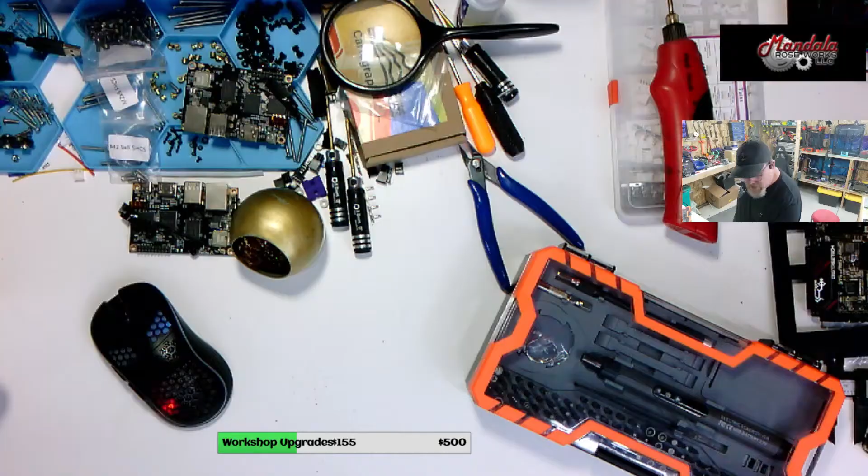Top-down camera. I picked this up off of the Amazons, my new little electric screwdriver kit. I paid 16 bucks for it. Comes with an electric screwdriver, it's got a bunch of torque settings, because arthritis sucks. It says off, so you got to turn it on. It still says off.

Turn on, man. There we are. Oh, yeah.

We got like 120 bits and all that crap, plus the charging cable and a bunch of spudgers and stuff in here. Nice little setup here.

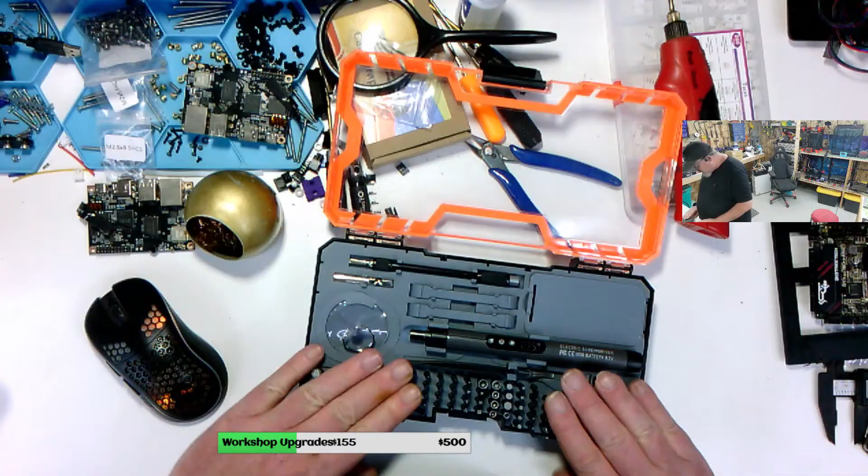My only complaint is there's no long bits. If anybody knows where to get the long bits for these things, please send me a DM.

Wifey's here. What's up? You're screwed now. I definitely am. It's fancy, it was $16.

I would really like to try Fanttik, but I can't afford that stuff. It's expensive, man. It's super expensive.

But arthritis just kicks my ass. I'm still trying to figure out what the hell this thing's for, it's a reverse of a Phillips. But yeah, we got all sorts of bits in here, and I'm looking forward to putting together a printer with it.

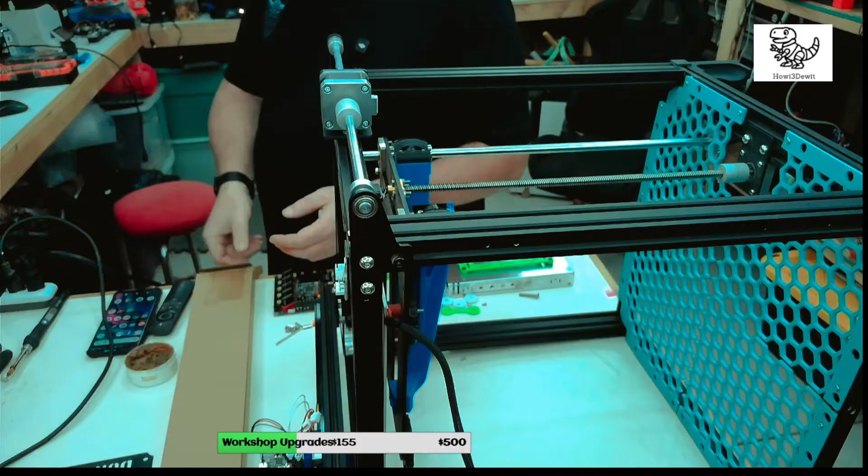And then let's go over here. You guys know we're building the Ender 6, right? So Amazon shipped this package right here in a 3.5-foot box, a huge ass box. And if you guys don't know, these are 2020 extrusions.

The whole purpose of this is to create the gantry for the Ender 6 Trident. Oh God, these are sweet, very nicely cut. European style, very thick. She thick, baby, she thick. Look at that, she thick.

And then we got ironic over here. Let's go back over to the main camera. So we got some 2209 steppers. I ordered a set of 3, right? Just 3. They sent me 6. I love Amazon screw-ups, so I have steppers for days.

And there's been a lot of, yeah, Amazon has standardized on fewer box types, which is dumb because it costs them money in shipping costs. So there's a lot of fun things going on here.

One of the things I want to do today is over here, camera. The one time I want you to follow me and you don't do it. Normal tracking. Come here, camera. Yeah, over here, buddy, the V0 right here.

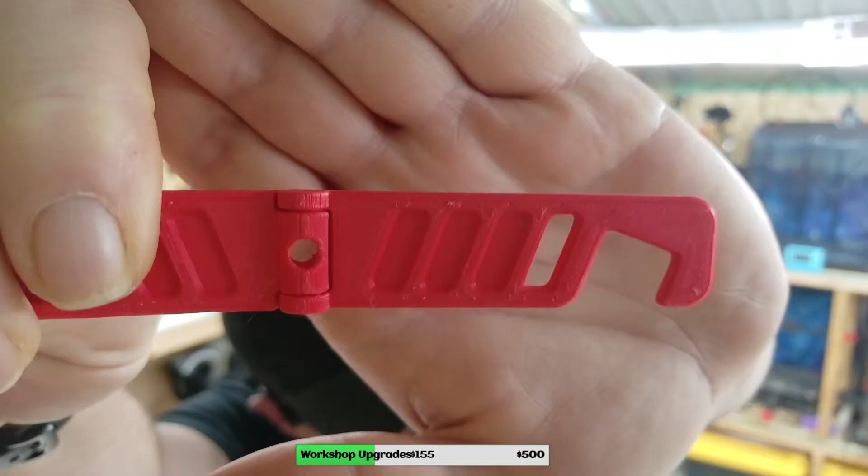And then we've got the DuEnder over here. We've got to do a little tuning on it. It's printing very nicely, but I got to show you guys this, there is an issue. If you guys look, this is a print off of the DuEnder. Now I'm not sure if the lighting is good enough for this, or if it will zoom properly. There we go, can you guys see in those slots there? It's a little ragged, and I just don't understand why. So we're going to tune it a little bit, reprint the same print, and see if we can't fix that up. And it's only ragged on one side, see here's the side that it's ragged on, and this is the side that was facing the bed. Can you guys see that? Yeah, there we go, that's a good shot of it right there.

4D chess, I don't know, 4D, 3D, I don't know. I'm a Trekkie, but I don't pay attention to the details like that.

Anyway, so we've got a lot of things we can talk about and do today. If you guys haven't heard, and I do need to actually update my Linktree profile with my GitHub, I've got the documents for the Ender 6 Trident up on my GitHub, and I'm contributing to that project daily. Nobody has that project documented anywhere. And the Ender 6 is literally the number 1 platform to make a Trident out of, because one, they're inexpensive, two, they're readily available, there are thousands of them out there on the marketplace.

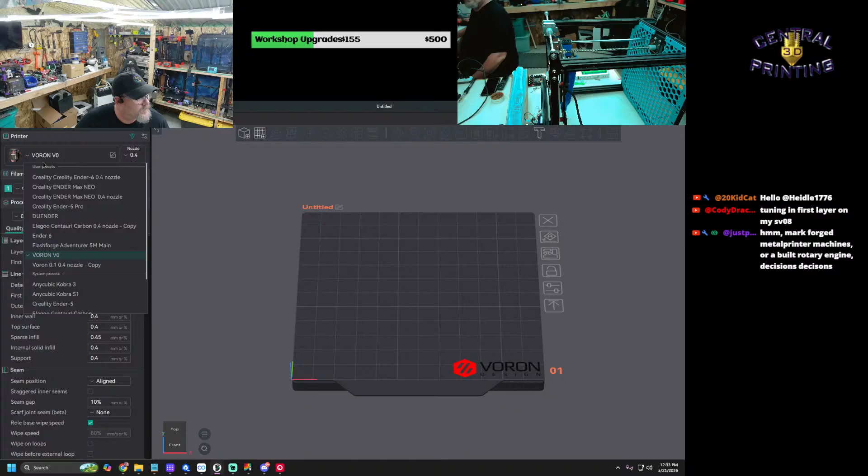So prepare, DuEnder. So we just got PLA in it right now. This is a basic profile that I've created. It was built off of, believe it or not, the Ender 5 profile.

Markforged metal machines, or a rotary engine? Decisions, yeah.

Similar to an Ender, it's a progress machine. Knowing that, I love it. Yeah, so the SV08 was, everybody was like, oh god, I want one, and then they got it and said, oh god, it's a piece of crap. I would actually love to have one if somebody were to donate it to me so I could actually make it go good.

So let's take a look at this thing. So this is a very conservative profile that I've got going on here. I've sped it up just a little bit, but not a lot.

Right now, a metal printer would be a large money pit, so it depends on what you're doing with it. If you're just doing it for hobby, it's a money pit. But I do know a couple of gentlemen that actually own a couple of them, and they print exhaust systems for cars, and they are making a ton of money. They went and got a loan for $250,000, mortgaged both of their houses, and got 2 printers, started off in a workshop in the back of one guy's garage, just doing fab work. And now they have a facility that's 15,000 square feet, and they're doing $5 million a year in work. It took them 2 years to get there.

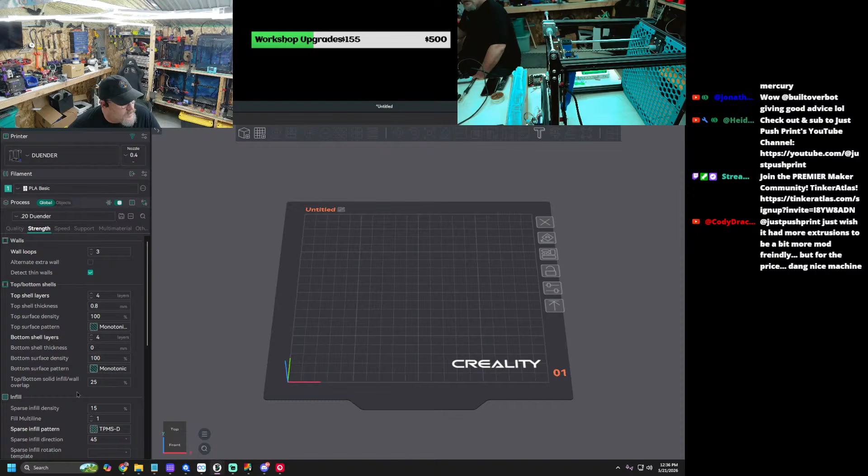So I'm trying to see in here, the quality. This is all going to be in the quality settings, obviously. Quality and speed settings are everywhere where this mess up happens. And it happened on 2 of these. I printed 2 of them, and it's the same thing. It's just a little bit of a rough section, and we just need to go through and figure this out.

Intake and exhaust systems, custom manifolds. Yeah, and there's all sorts of actual good utilizations for that. I actually know a gentleman who's designing custom engine blocks, not for cars, but custom engine blocks for high-speed competition chainsaws. And he's actually having the same gentleman that I was just referring to print them.

So let's actually open up this model. Wherever the hell the model went. This is odd, why isn't that project there? I don't know. Okay, there we go, here's the phone stand.

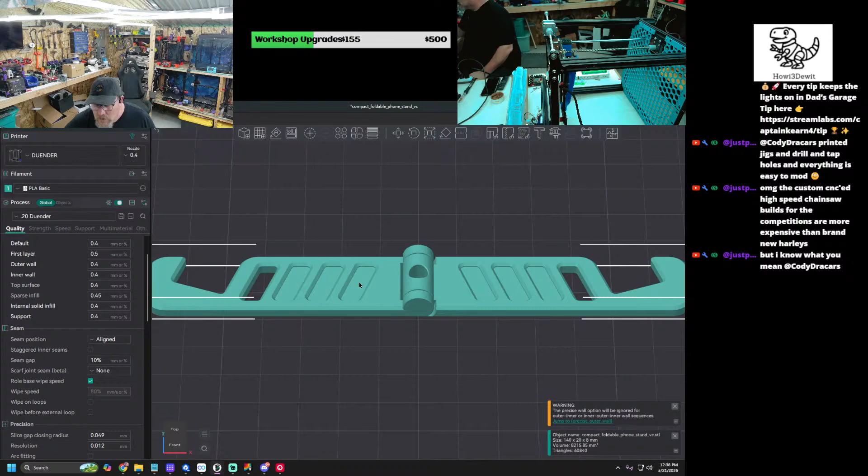Oh, I know, JPP, I know. I mean, they're insane. But instead of being CNC, he's having his chainsaws printed. And I'm like, are you absolutely mad? Because they're cheaper to print.

So you guys, tell me what you guys see here. What should I be changing?

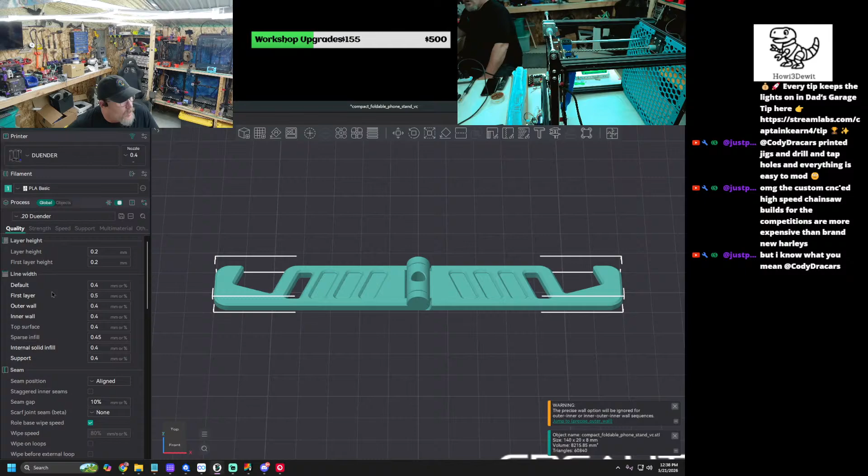Let's look at the basic PLA profile first. I just chose a Bambu Lab profile just for the hell of it. Was that a spider? No, it wasn't.

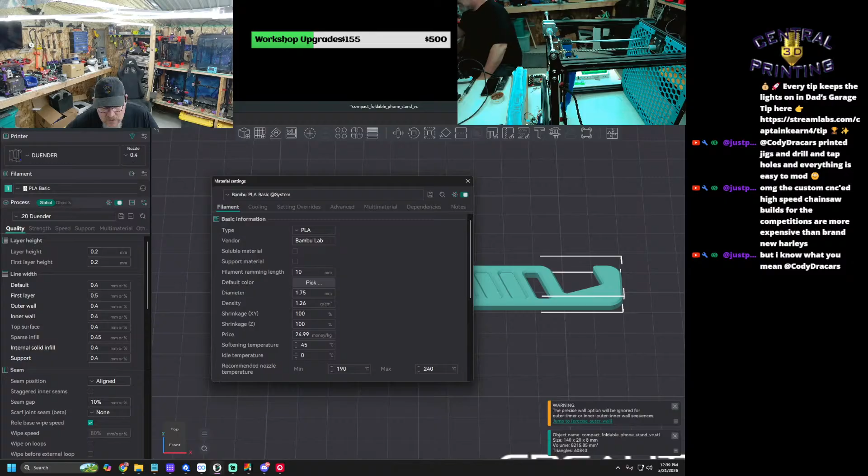Let's do this, let's do this. We're just going to turn the main cam off and the Ozbot cam off on this, just so you guys can get a full view of this.

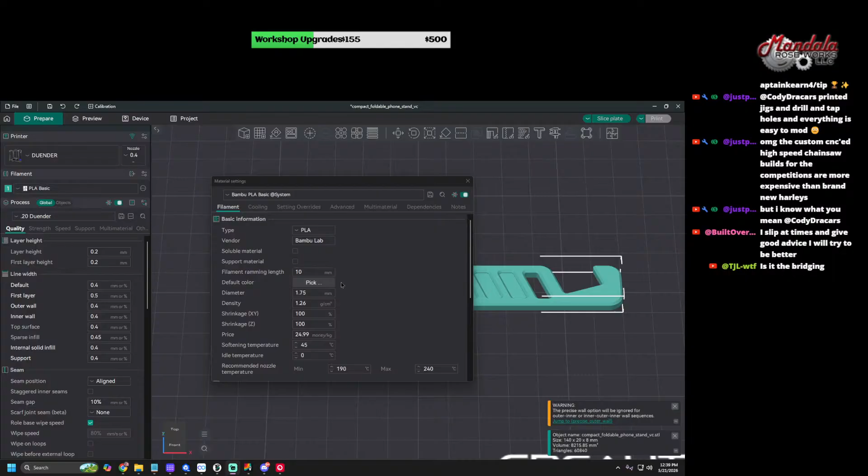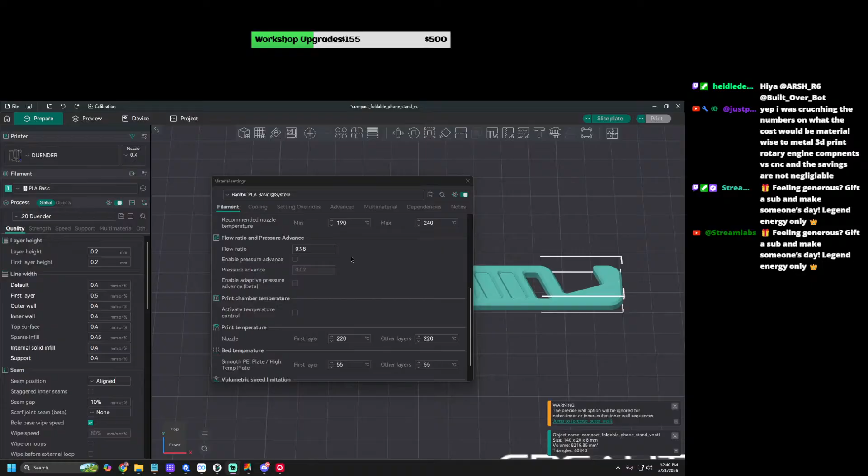So I want the community to come together to help me figure this out. So we're going to start off with the filament profile. This is just basic PLA. Flow ratio is 0.98, pretty much standard. Now, mind you, this is a mini Sherpa that I have tuned, but we can do that again if you guys like. We can retune and ensure that 100 millimeters is 100 millimeters.

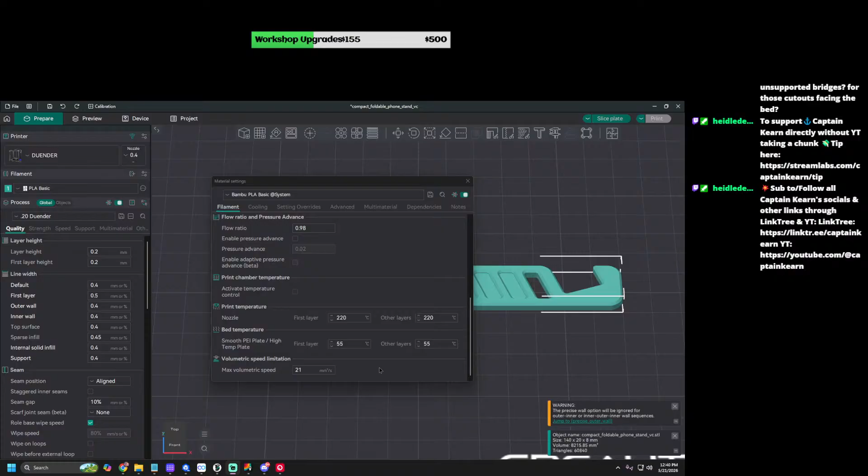I mean, I guess you could consider those unsupported cutouts, but they're very small and very short. But we have other defects in the print as well. So...

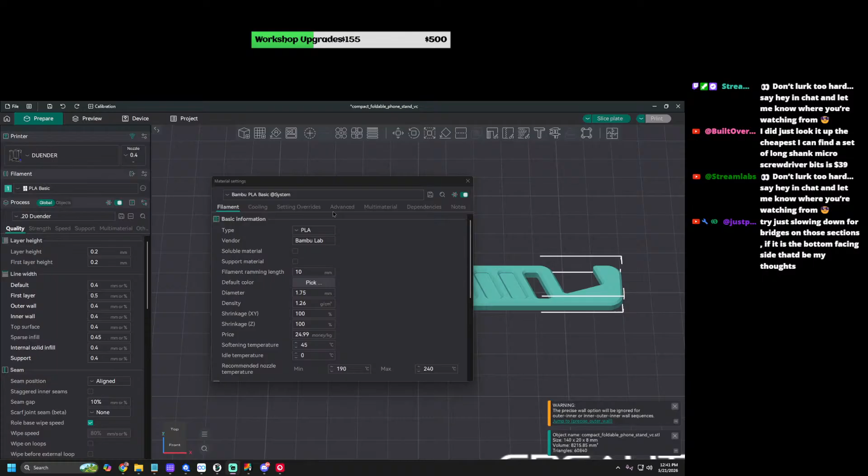Slowing down for the bridges in those sections, we could do that. I mean, it's like, this is a very quick print, so.

What are we doing for bridging on this? I don't even remember what we're doing for bridging. Overhangs, bridging, gap infills, blah blah blah. Bridging - I mean, we're actually going pretty damn slow for bridging.

TJL, what's going on? Welcome. All right, you guys are saying bridging. All right, so we're going to slow this down. We'll slow down to 15, and slow internal, because that would be an internal bridge. We'll slow that down to 35. Just give it time to just do its thing and cool.

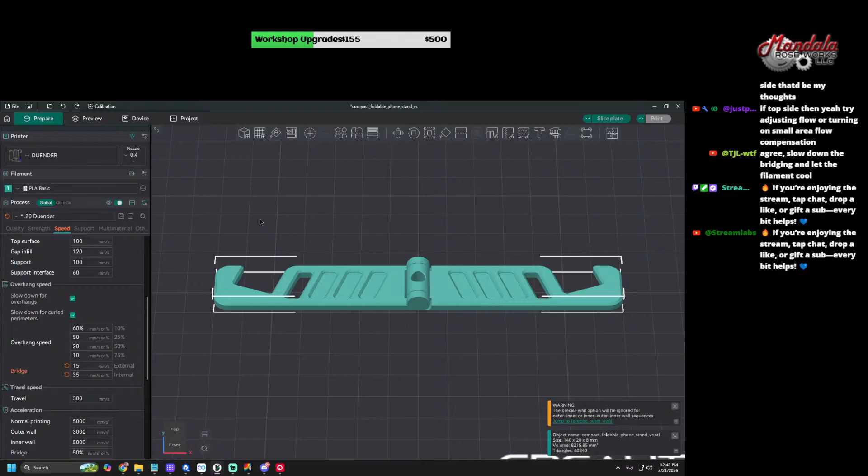Slice the plate. Slice the plate, slice the plate.

And I do believe that there is a camera on that thing. So what we're going to do is add source. I believe that's the S6.

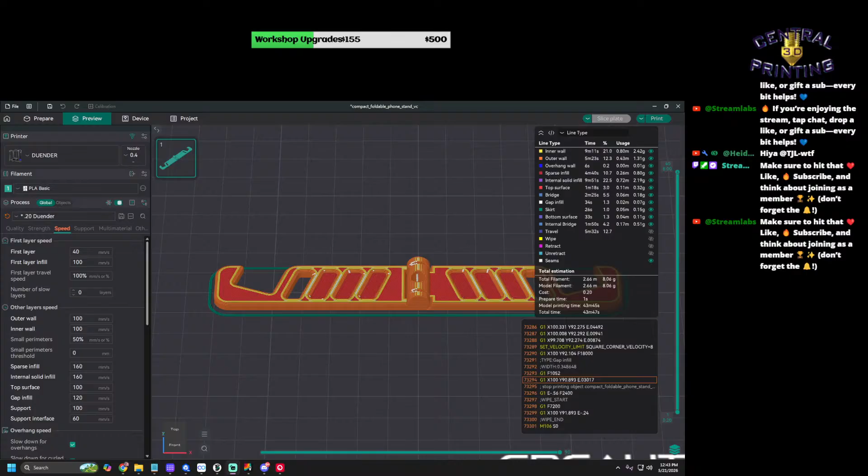Ah, there we are. So while we're playing with this, we'll just do this and...

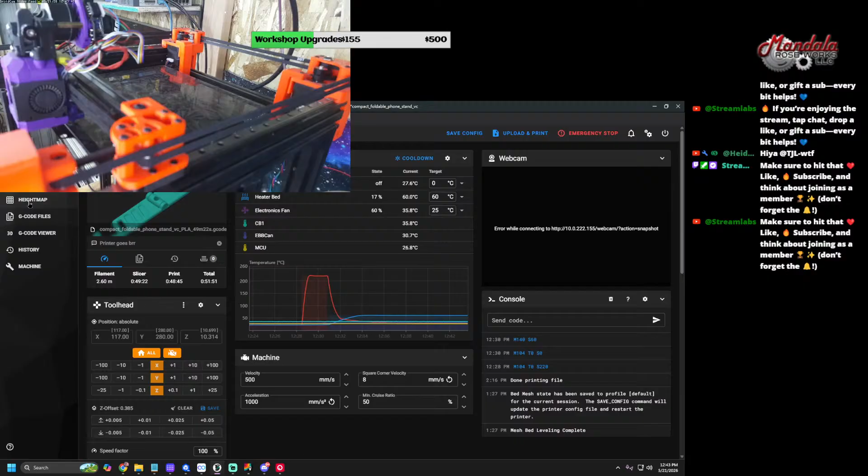By the way, this machine is using a BD sensor. If you guys haven't seen this, we're gonna home it here. And then upload and print this baby.

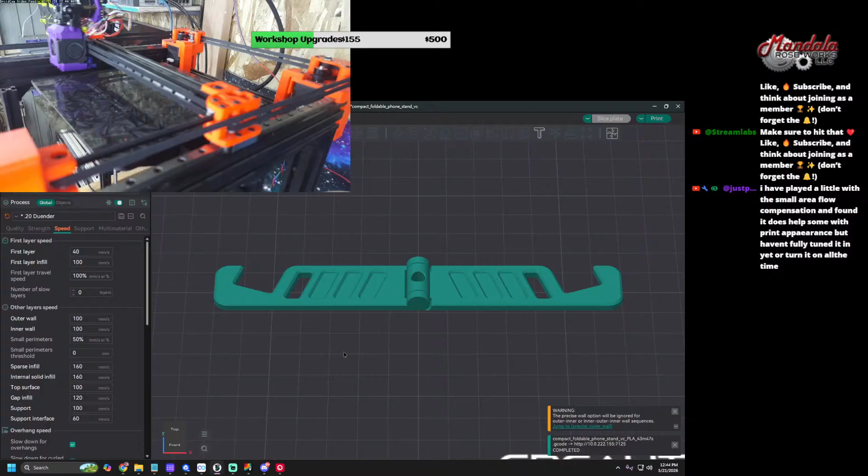And once we get this print started and, you know, make sure everything seems to be copacetic, we'll move on to the next little bit of whatever we want to do today.

No, the top side seems to be all right. It does need a little bit of tuning, but not as bad. But I wanted to test it one piece at a time instead of making a bunch of adjustments, obviously. And it's such a small piece that I don't mind wasting some filament.

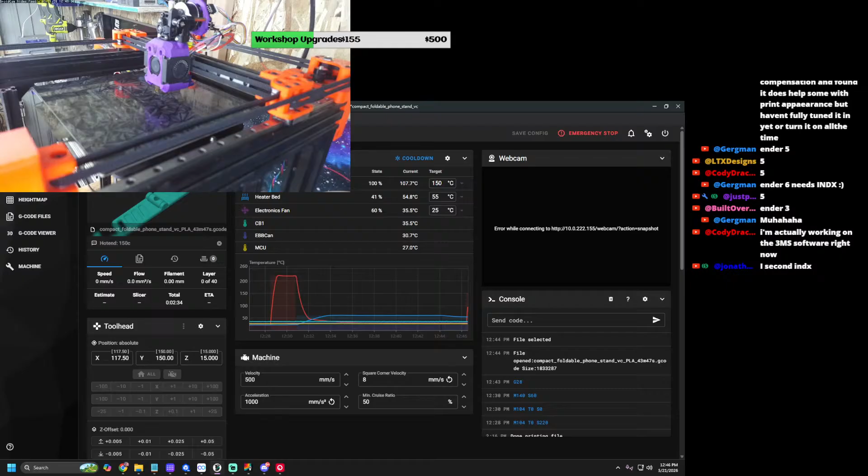Okay, if you guys sponsor it, I will put an INDX on it, on the Ender 6, on the Trident. You guys come up with the cash to do it, I'll do it. You double dog dare me to put a 3MS on an Ender 3.

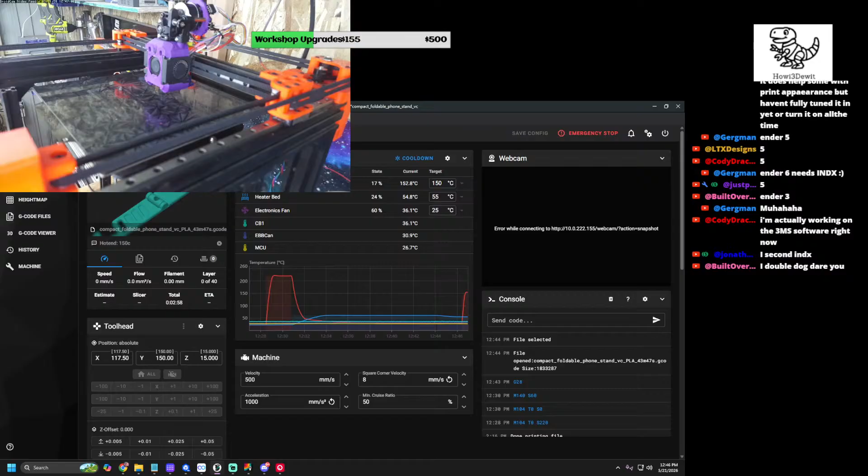All right, hold on, just hold on a second. Ender 3. I will put a Stealthburner on this thing to make it even worse than that. And we'll put a 3MS right on the top of it.

I don't know if anybody's done an MMU3 Ender 3 yet. I'm pretty sure somebody's done something stupid like that. I'm more than happy to do stupid things. I mean, it's sitting right here. See, it's right here.

I do need to actually - you know what, while I'm thinking about it, hold on. Excuse me, God dang, I hate coughing into the microphone because I don't have the ability to mute it remotely. Where's that bag of crap? The bag of crap is where? Ah, wrong bag. Ah, there it is.

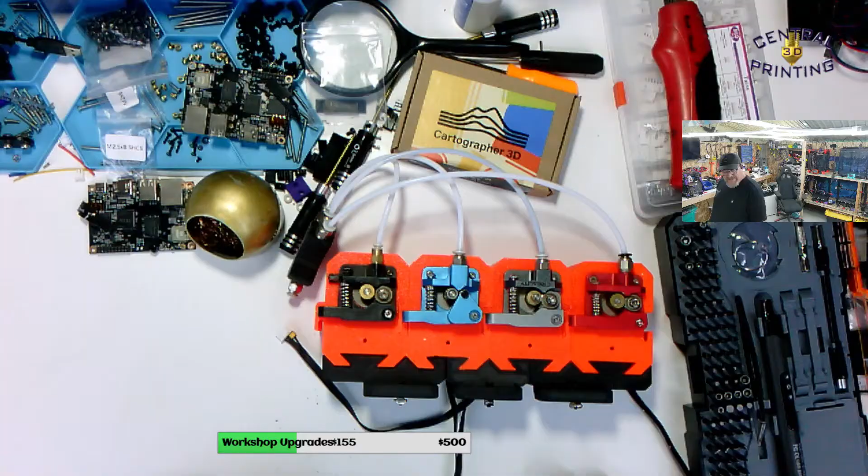Caleb, you're seriously late. No, you're just in time - no such thing as being late.

Do, let's see. Okay, those are really hard to get out. It's a 2.5.

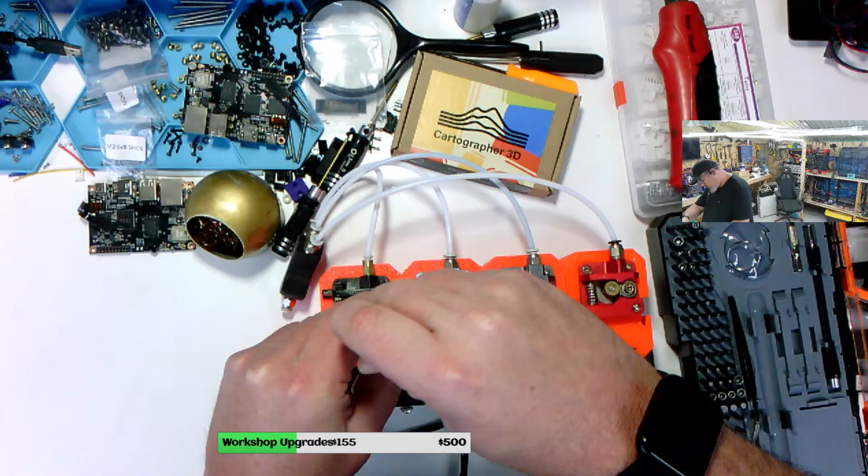Yeah, so it doesn't like that. It says too tough, need manual help.

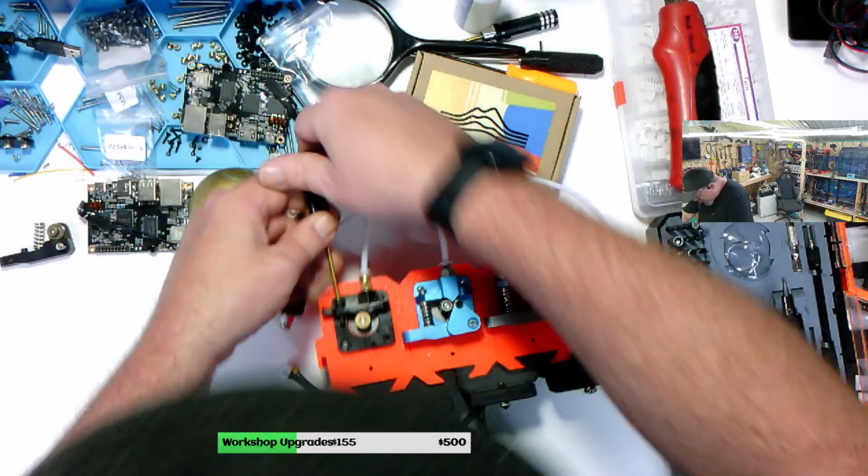There's just certain things that I don't want on this, and that's plastic. I think the next one I build is going to have HGX on it, but you know what? I just don't care. I have all these from all the old Enders that I had, and I was like, I want to use them. I have so many extruder motors.

And if anybody knows where to get longer bits for these, like the really long ones, please let me know.

Oh dear Lord, that thing is tight. It should not be that tight. There's too many ugga-duggas.

Well, it does come with a bit extender, but it's got this damn thing. But I want the long shank ones. I'll show you what I mean here in just a moment.

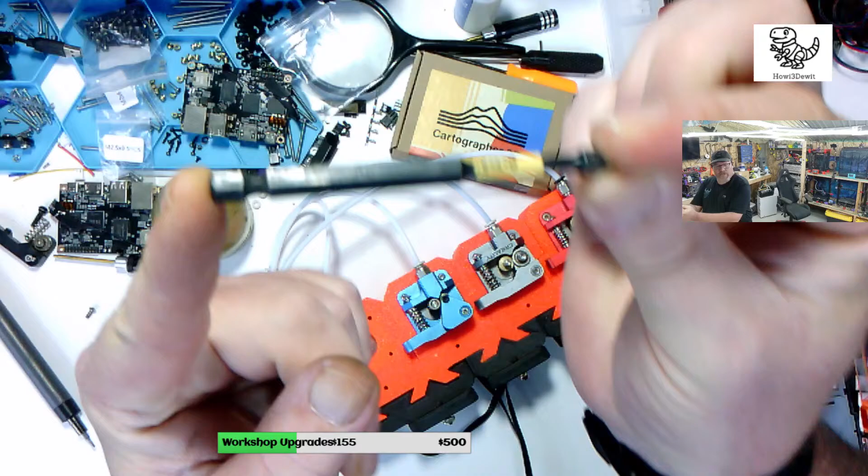So what I'm talking about is these types. Come here. You know, long shank bits. Of course this is 1/4 inch, but long shank bits like this. Except I want the long shanks. That way they can go into the smaller areas.

And I've seen them on other people's streams before.

What do we got going here? Got V0. You guys are so funny. Too funny.

All right, we will get rid of the plastic and put another aluminum one on, because these aluminum ones actually kick some ass. They're not the... I've only got one. Do I have a... yeah, I've got one double gear on here.

Let's see how this is printing. We'll see what happens.

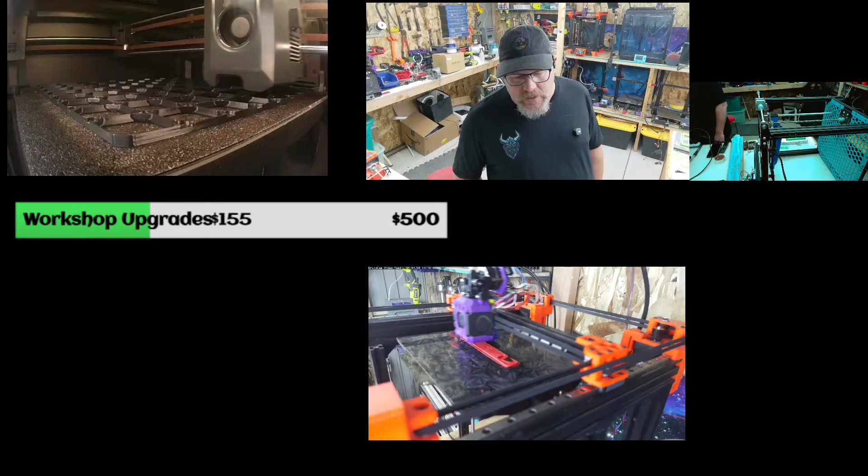Let's check on that printer. Look at that, look at it. Oh yeah, by the way, the Centauri Carbon is printing multi-board. And the V0 is doing nothing. Let's go to that screen there. Oh yeah, it's really slowing down for those overhangs. Sensation Black, yes.

Well, I'm glad, I'm glad you're here, you know. And I'm glad that I can talk about it these days. It was a rough time. It still is a rough time.

Craigard, well, yeah, thank you. No, my daughter was killed by her boyfriend in 2022. He shot and killed her, so it was the most horrible thing that I've ever dealt with in my life. He is now rotting in a Nebraska prison, and I pray to God every day that he never, ever, ever comes out of it. But enough of that. We're not here to get anybody down. I do appreciate the sentiment, though.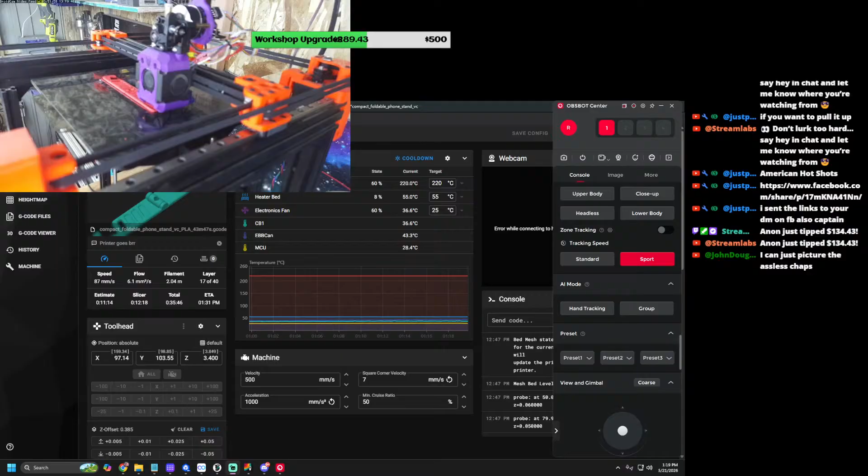You can just picture the assless chaps. Oh my God, dude.

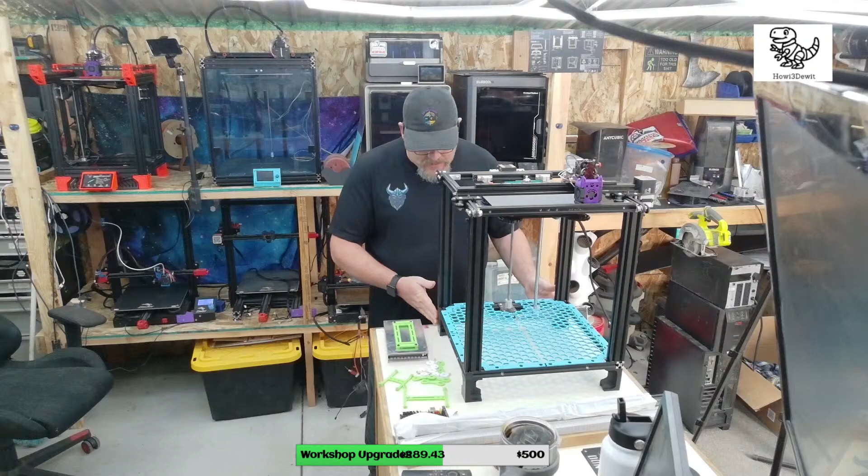There we are, you guys, we have legs on the Ender 5. These are the previous legs off of our friend that guy makes. Didn't work out, and I wanted to support his work, but sadly they just don't work for what we're doing. So we put the legs off of the Mercury 1 kit on. I accidentally printed 3 of the A's instead of 2 B's. Yeah, it happens. So we're here now. And look at this, we have the Fysetc EMS system going on.

I need to figure out how to mount this crap, because mounting this is absolutely driving me insane. So it's teal for the base, and then this beautiful green. Getting this underneath here to mount and getting these screw holes to match up so I can actually screw it onto the actual power supply is damn near impossible. I've got everything else, all the other electronics, pretty much figured out.

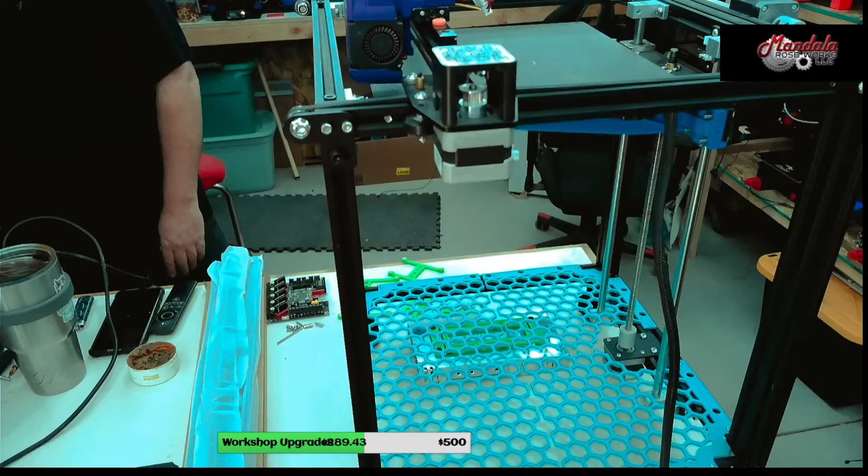It looked like black in the distance. Yeah, so let's go over to that camera, now you can see it better. Oh yeah, while we're waiting, let me go to the DMs, because you sent me the cartographer beacon probe, the Hakuna Matata.

Download. Every single day I have to log back into printables. What is going on with that? That is driving me absolutely batty.

All right, so Orca Slicer. Go in, I'm just gonna add this to the current build because why not? It's the same settings, it's all Voron settings, nobody cares. Slice them, plate them. Oh no, that needs to go into purple. So, objects, and change the color to purple, slice, plate. 49 minutes, remote print, you got it baby. Start print, let's go.

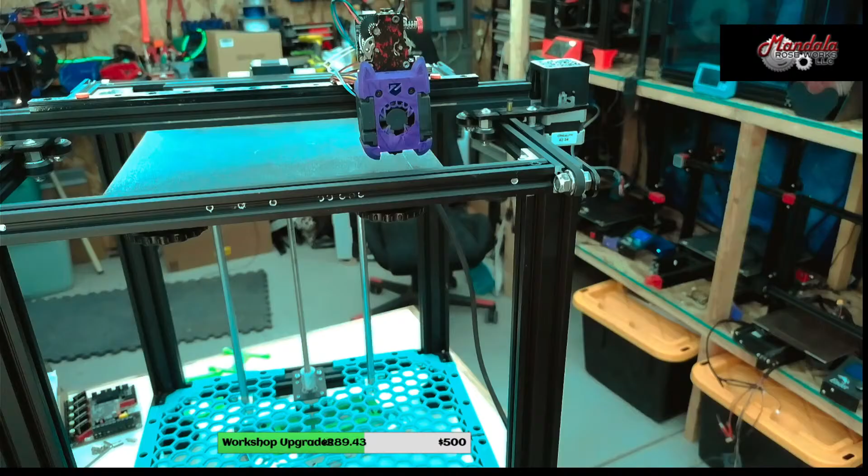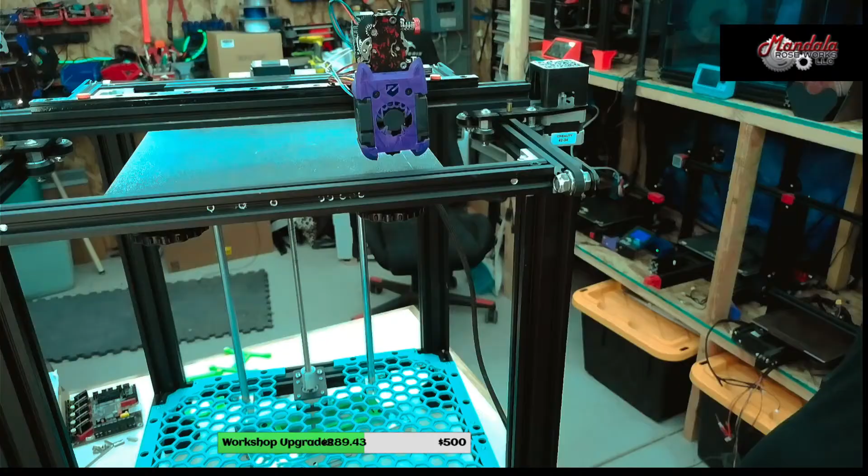So yeah, if you guys haven't seen, I've got this weird looking dragon burner tool head, the cover on this thing. Let me show you. Look at this. There we go, you guys see this cover? Not John Doug, but Jeff Fafa, Mad Dog, was giving me shit about this thing. And yeah, I think it's pretty cool looking, it looks kind of mean. It's supposed to be a two color print, but I just printed in one color just for the hell of it. It's supposed to be like this monster looking thing, the teeth are supposed to be colored and all that around the ears. I just didn't do it.

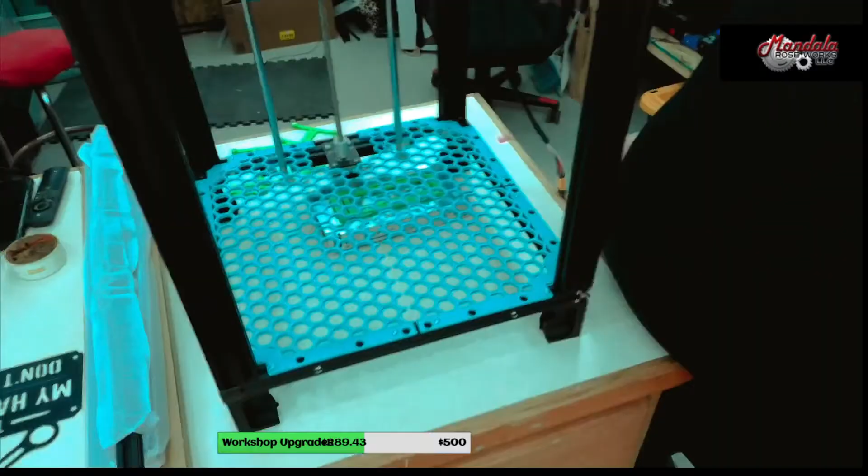And we have rails coming for everything. So, but getting to this, let's get this camera put back down here. Come here, screw.

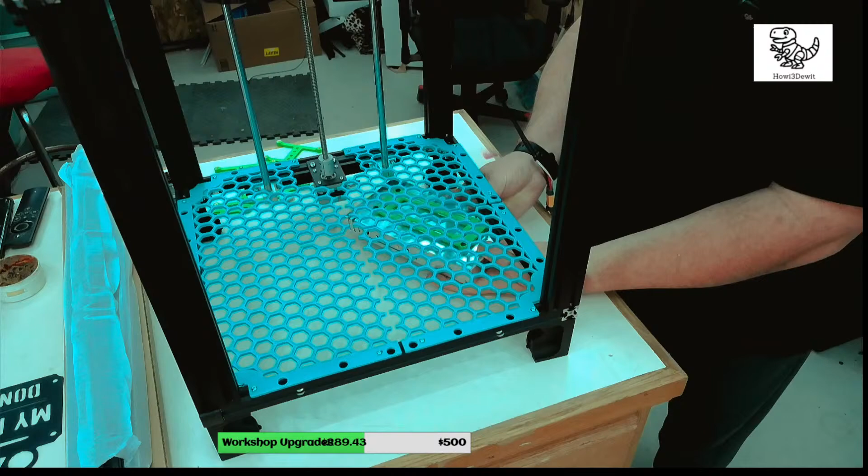So I need to figure out a way to get this damn power supply mounted, and it needs to go in this corner right here. It needs to span these two right here like this. And so I've tried this, and I've tried spanning this, but it doesn't line up anywhere. It just drives me insane. So has anybody done the Fysetc system with an LRS power supply? That is my question.

Make a new one? Oh my God. I can't make a new one, Cody. I can't.

I just can't do it. I don't have the power. Ow, what the? Are you kidding me? Come on. Oh, there goes my back. Holy shit, that hurts.

Drivers rolled off the damn bench. I don't want to make a new one. That's the reason why. I just don't want to.

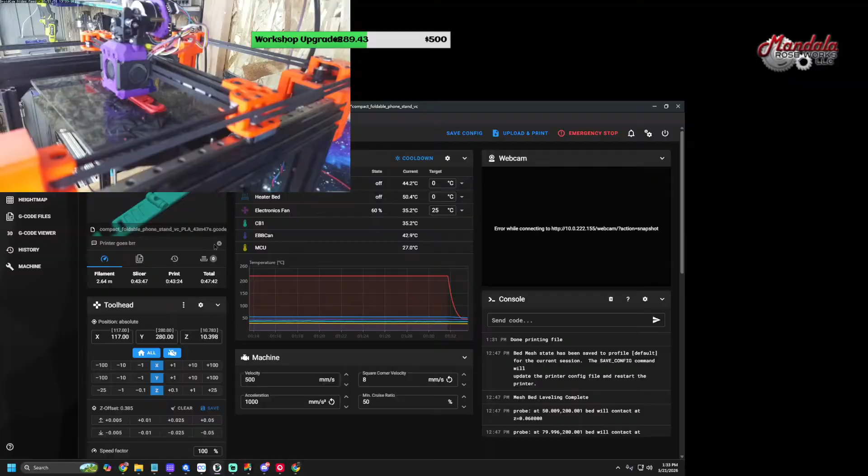So let's see. Let's go to display. Try adjusting that. Yeah, the gaps are a little bit funky. What am I doing?

Put that YouTube zip tie mechanic certification to work on that PSU. Come on, Brad, what are you doing, buddy? How you doing? Are you out fishing? You better be out fishing. Catch all them fish.

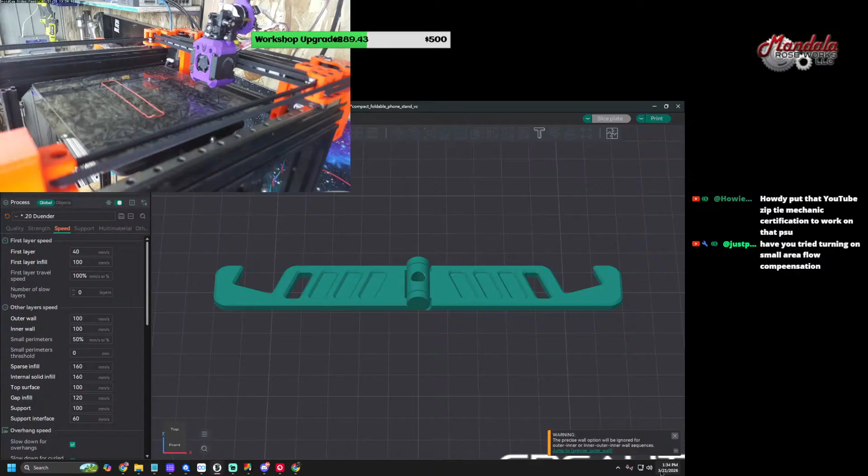All right, so first thing we're going to do, we're going to take a look here. Let's take a look here, make sure everything's copacetic. Holy crap.

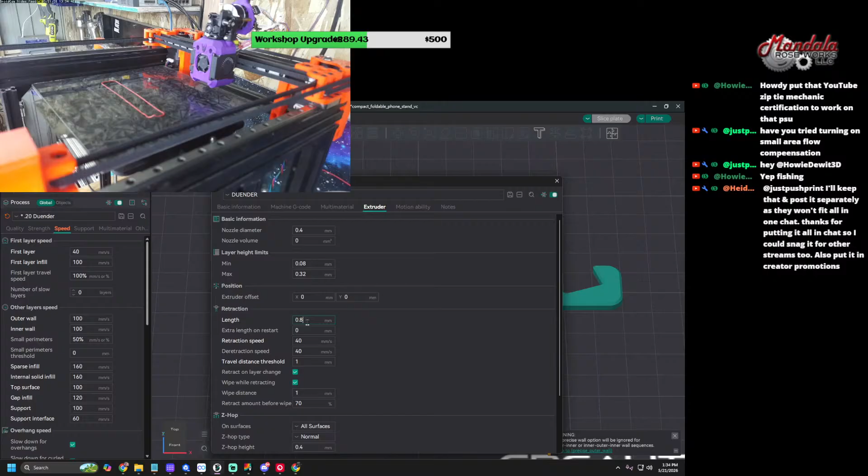Let's drop the retraction down to 0.2. Jesus Christ, that's a lot of retraction. Let me save that.

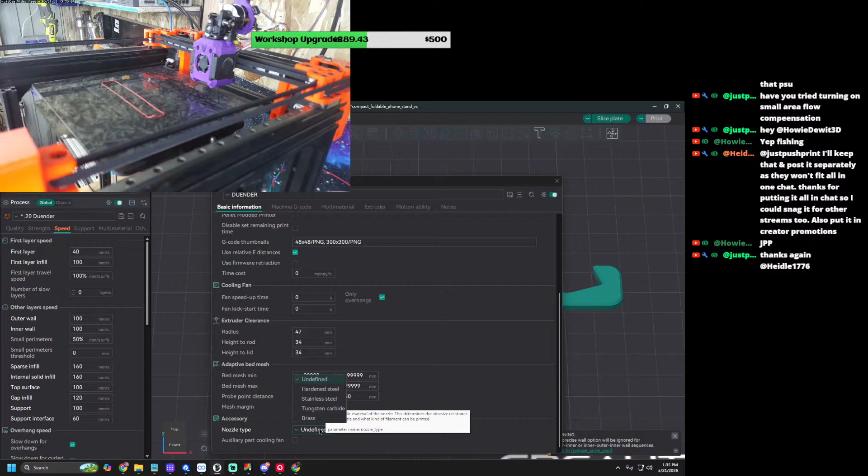Basic information. I just want to check some stuff in here. What do you mean nozzle type undefined? It's a hardened steel nozzle. Now stop it, you little butt munch. All right, close that.

Okay, so let's double check some stuff here. Bridging flow ratio. So we should lower this number down, right? Is that right? What should we lower this number down on the bridging?

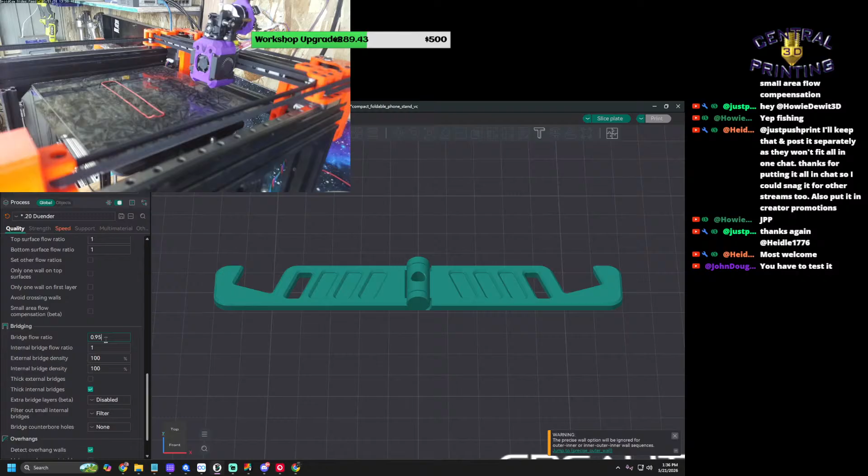Take it down a little bit, like by 10? You guys think that would be good enough? I'm grasping at straws because I haven't dealt with a lot of bridging stuff, to be honest. Not at least not on this printer, so. And you know, well, I have. I mean let's be honest, I have. John Doug, you have to test it. Well yeah, but what starting point would you guys go at? Start it by 5, start it by 10?

0.8. Okay, yeah, we'll try 0.8. Just a starting point, that's all I'm asking, your starting point. We'll save that.

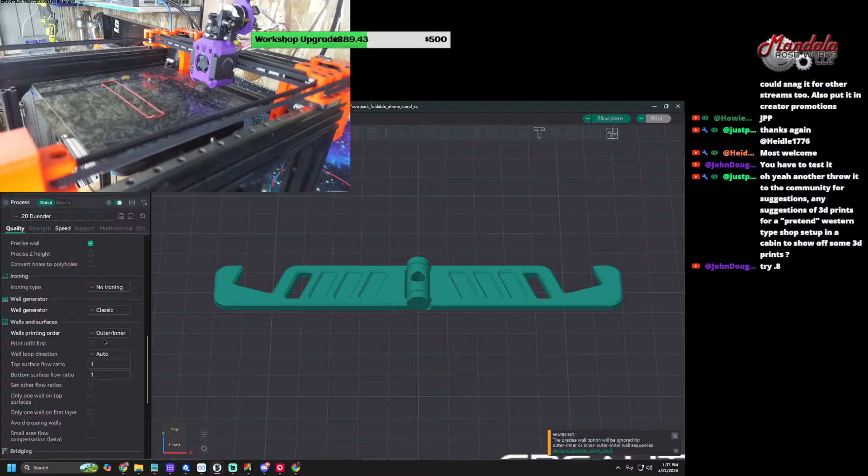And then we'll go up into the actual profile here. And the actual flow ratio, it seems like it's going a little hot, so we're going to take that down to 0.95. And we're going to enable pressure advance on it, and we'll leave it at 0.02 for now, because pressure advance wasn't even set.

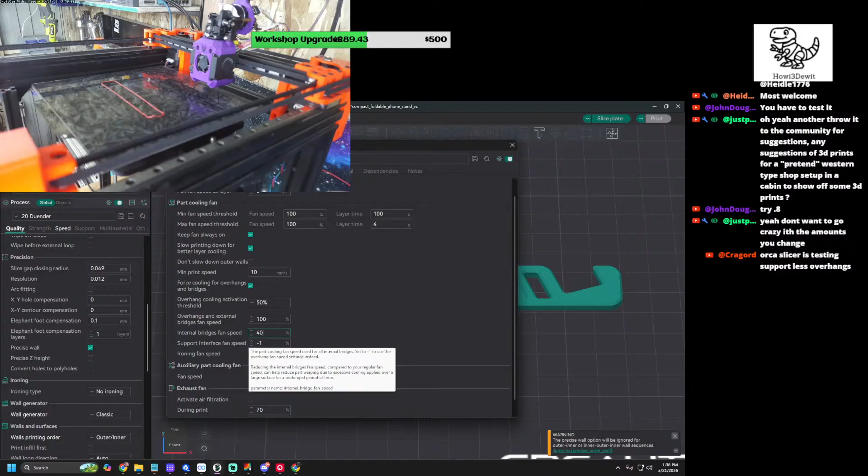But let's go to cooling before we save anything. And internal bridge fan speed. Wait, internal bridge fan speed, the part cooling fan speed used for all internal bridges, set to -1 to use the overhang speed instead. Oh, hell no, no. We'll start off with, I think I was using 40% on another profile. Does that sound about right, at about 40% on bridges? Yeah.

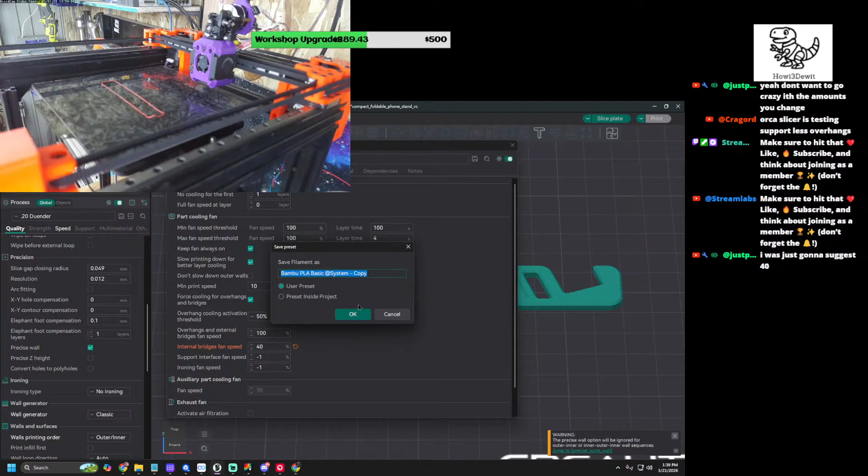We're just going to label this PLA basic. And I'm just going to put no cooling for the first 3 layers because why not? We changed a couple of things there. We'll slice the plate.

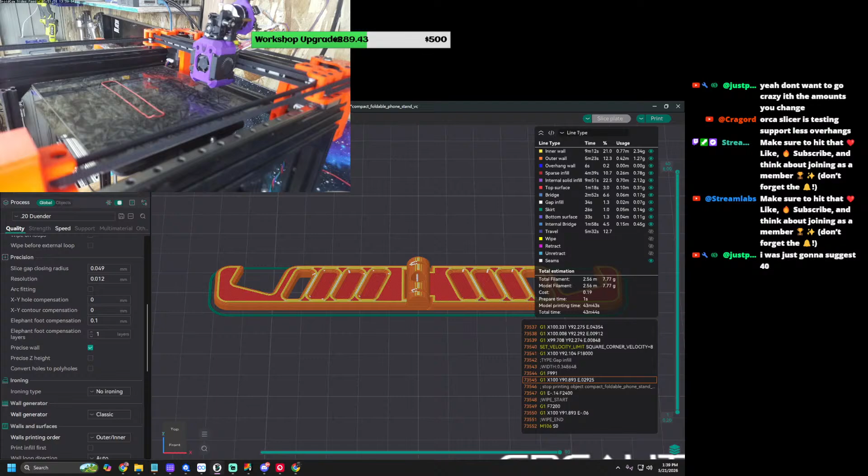And wait, hold up. Hold up, something I want to look at here. Where's my start code? Okay, that's fine. Now we need to go to the device. Yes, thank you very much, machine. Let's go to my macros.

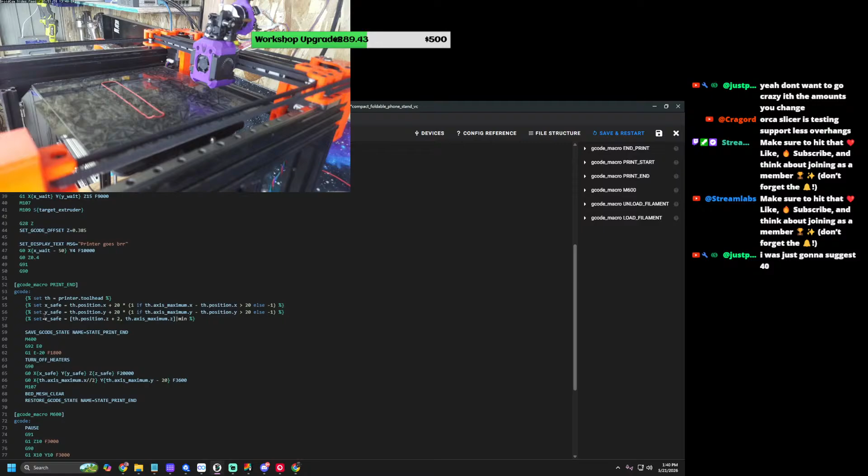Okay, yeah, sure, printer goes brr. Print end, print, okay, the print end, I need to find out. I don't have any retraction in the print end macro, so why is it doing such a huge retraction? G1, F1800. Yeah, there's nothing.

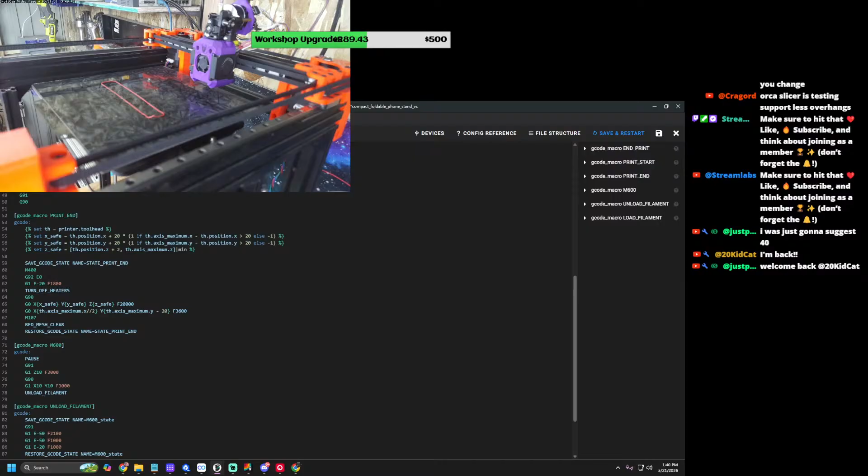All right, send it. Print it again. All right, there we go. See, we're doing all sorts of stuff today, everybody. We got things for everybody. Oh, crap. Get that off of there. That'll fudge everything up.

You guys haven't noticed, but my logo is actually embedded in the front of the toolhead cover on that, and I absolutely love it. It's the same thing on the Voron V0. I actually did the same on that. Actually, I want to reprint that.

Alright, so in a couple of days, next week's actually going to be pretty much shot, I think, because wifey has surgery on the 29th. So we might be able to do a stream on the 28th. But on the 26th, we're probably going to be starting on designing the gantry for the Ender 6 Trident. There's going to be a lot of measuring involved.

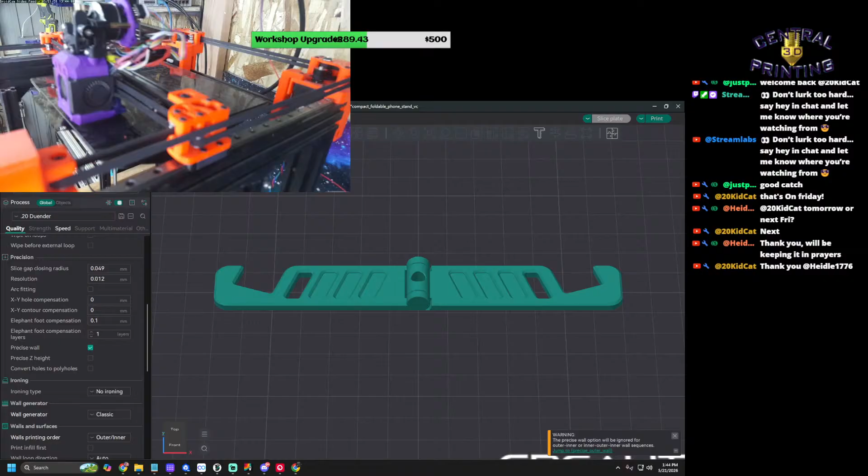Okay, anyway, so we're going to wait till that starts, and then we'll move on and see if we can get something going here.

It looks like I'm going to have to print more of the nubbies, and I'm going to have to do a better job because these didn't print very well. Oh, look, I do actually have one more. So let's get this off of here.

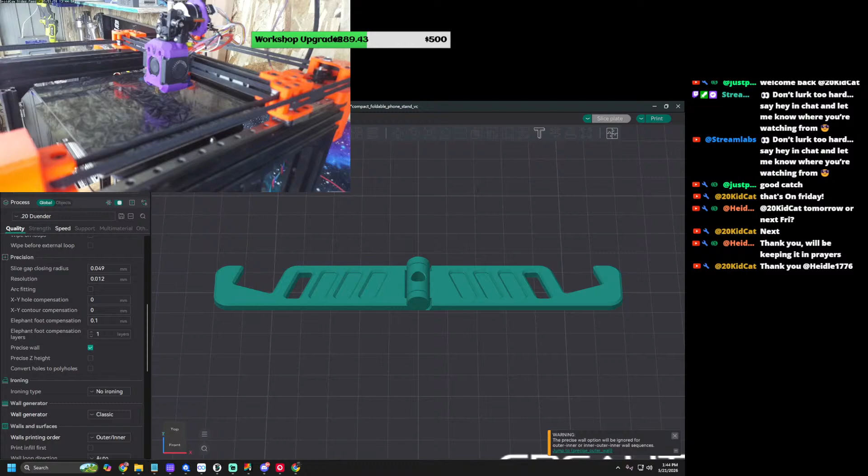What do you guys think of LDO's new mini 48 volt power supply? I kind of want them because I want to do 48 volt in the Trident, the Ender 6 Trident. There's a few surprises that are going to come along with that machine. I'm pretty excited about it.

The funny part is I put a Manta M5P in it. JKD Buck, what's happening buddy? Good to see you, it's been a long time. But I put a Manta M5P in it, and then I find out that it's not big enough. So we're going to have to end up upgrading that to either a Manta M8P or go with something bigger like a Kraken.

Because we're going to be going 5160s. It's going to be interesting. I kind of like the Manta platform. I actually need to talk to Mellow and find out if they actually have a platform that supports 5160s all the way. I've read that some of them do, but I need to find out everything.

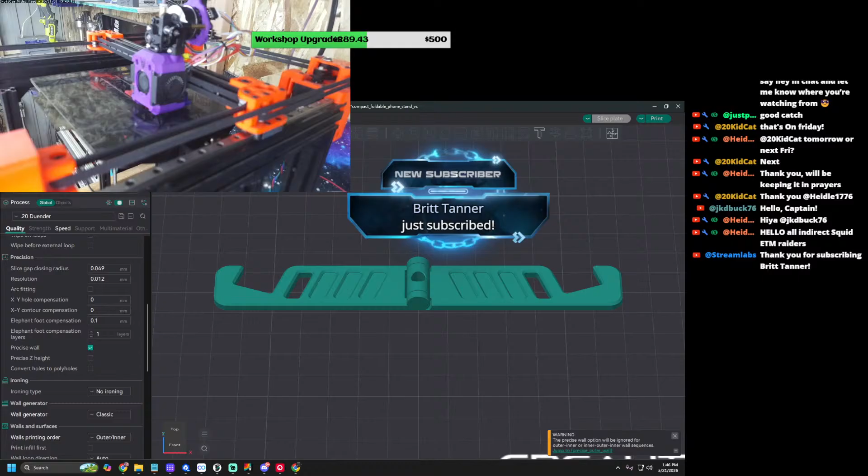3D printing, it's amazing, it was only a dream when we were kids. Yes, it is in fact totally amazing. Right now we're just doing some tuning and testing, printing off these little...

What the hell was that? My whole building just shook. There's no wind.

Gee, many crickets. But what you see on the screen is a foldable, collapsible cell phone holder that I did not design. It's a file that I got off printables.com. We're just trying to print it on the Duender and make sure we can print it beautifully on that machine, because this is a machine that I built from ground up.

Made it out of 2 old Ender 3s. And just trying to make it awesome. Awesome and possum.

So, but for now, we are going to be in the Ender 5. We're going to be throwing in this SKR3 Easy because it's what I have on hand. I could put a SKR3.

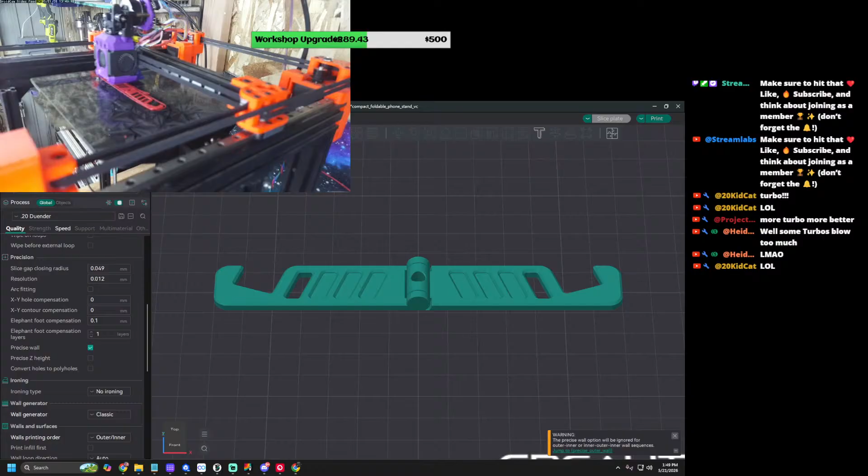The footprint on both is technically the same. I mean, we're just doing what we want to do here.

By the way, if you all haven't, the E3 V3, well this is the big boy of the Mini. This is the SKR3 Easy.

There isn't a supercharger, you got to go turbo. Yeah. Naturally aspirated turbo. With 100 shot of NOS, man. And blow the doors off them some bitches. We're gonna put it in a 1962 Cadillac. They'll never know what's hitting them.

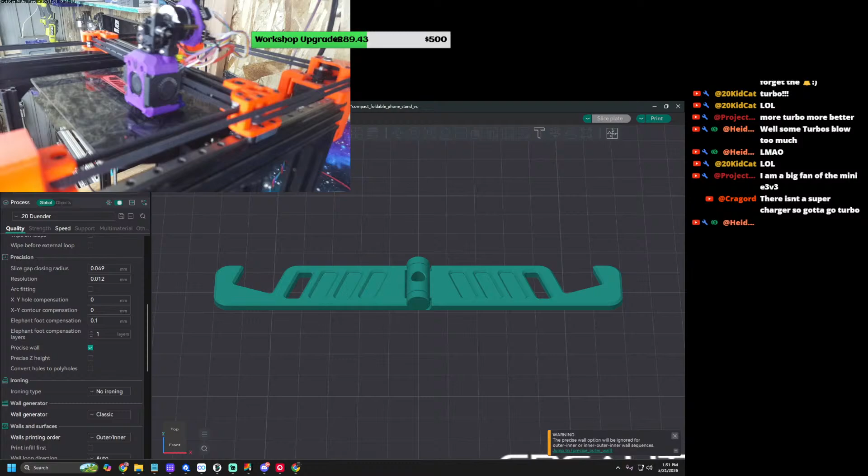If you guys haven't guessed, I'm indulging in my very bad habit. And I'm done with it. By the way, we're almost done with that journey again.

Oh, they all have bugs. I mean, it's just electronics. Well, I think for the moment, I will keep the turbo because these things are rare. The turbos are rare. And I'll be replacing the board in this anyway once the Mellow equipment shows up, because we're gonna be testing that out.

We're just gonna go with this. I've already printed the mount out for it. So we're just gonna go with what we've got. Let me go to the build camera.

It's not a vape, buddy. Not a vape. Oh, dear God. So let's see if I can put this on without breaking things.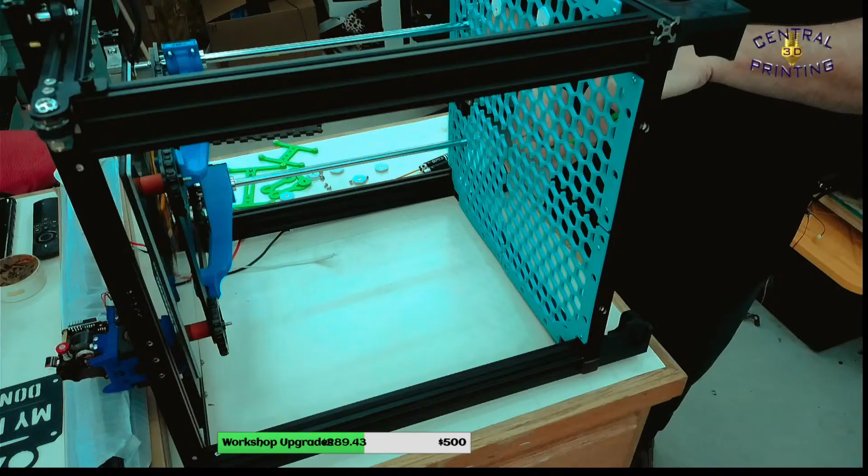So I do believe that this one went at the end. I have everything I want laid out properly. This is the only thing that's been giving me fits, is this damn power supply mount. Son of a... Well, that screw just got lost to the ether.

Oh, dear God. Oh, that... Yeah, that did not feel good. I can't see chat from over there.

The board you already own is the best board. Yes. The ones you don't have to spend money on.

You can do it. Get in the hole. Get in the hole. There's one.

What's up, LTX? You must sacrifice to the floor gods. Absolutely. The gods of the floor, man. They demand their sacrifices, especially M3x8s.

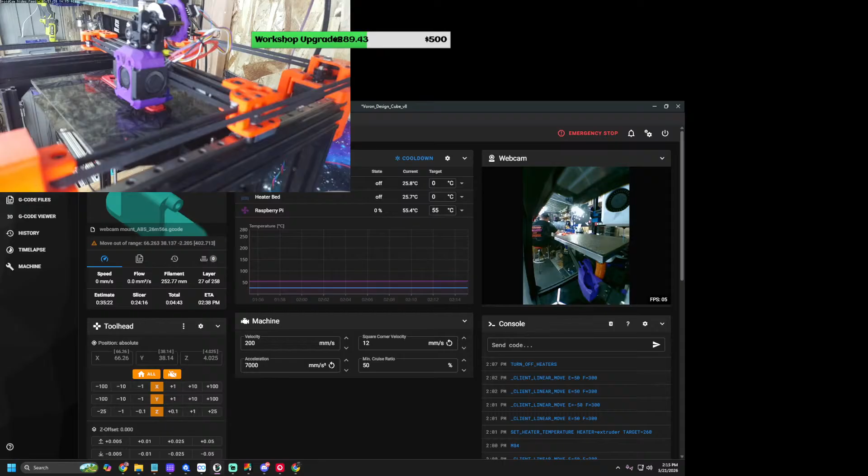That is awesome possumness. So let's go to the display screen here and turn off that camera, because we don't need that camera for this.

This is my brand new Voron V0 that we finished last week. That was sponsored by Mr. Howi3Dewit himself. It's part of the Voron PC project.

If you guys don't know what that is, let me bring this up here - and that way I don't dox myself real quick, because I don't have any idea what's up on the rest of these screens. Yeah, that would have been a very bad idea. Something's up with printables, has anybody else noticed this?

There we are, okay, so go to this screen here. This is the Voron PC project done by Mandic Really, Alan Mandic. He's a really good guy. So I built the actual PC, it's sitting on the floor over there, and I had this. Yeah, printables has been DDoSed recently and they've got all sorts of weird issues.

I had this weird idea. Alan did something really nice, really awesome, he built this really incredible project. I mean it's cool, it's awesome looking. I've got one sitting on the floor. There's just one problem with it.

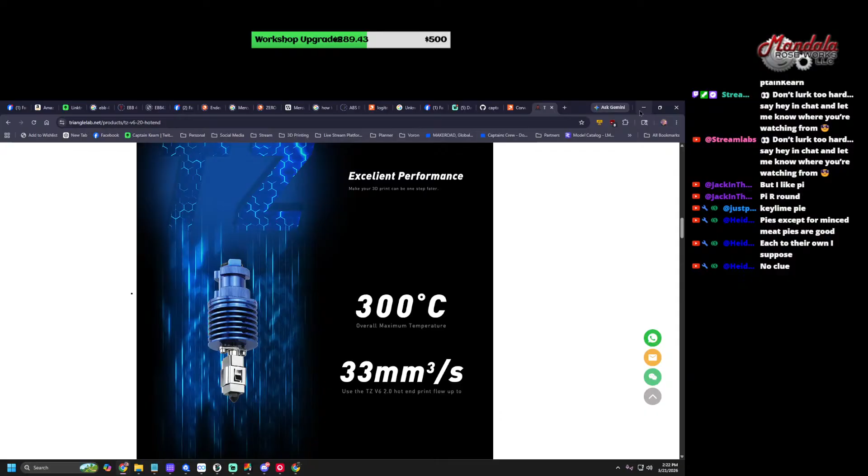You always put it just a little bit above, that way there's a little bit of temperature variation on your PID tune. Let's PID tune this one more time. I'm PID tuning it to 265 for a reason, by the way.

Oh my gosh. Size of my back is huge. I am 270 though, but I've lost 40 pounds. Yeah, I wouldn't think it would either.

But see, I need this machine to work perfectly so that I can do the testing I need to do on these brand new Firethorn plates, because these plates are supposedly the shiznit.

And it prints PLA beautifully. It even prints PETG beautifully. But it just does not want to print ASA or ABS, and I don't get it. I've tried 3 different brands, and it just says, oh, hell no.

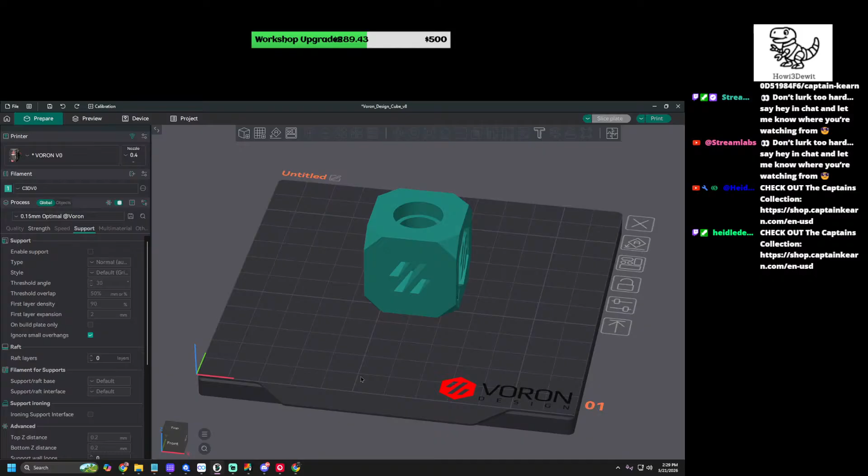So we're trying to figure that one out. We have gone through and I have done all sorts of things, so we're just trying to figure out where do we go from here. We've got a Voron test cube here, and we're just going to do a first few layers real quick. This is pretty much my multi-profile here. It's not even - I use a Polymaker profile just for the hell of it.

265, 105, volumetric speed, 12. Cooling, nothing for the first 4 layers.

This is a V0, so it doesn't care about most of the rest of that. All right, so let's just do a full send.

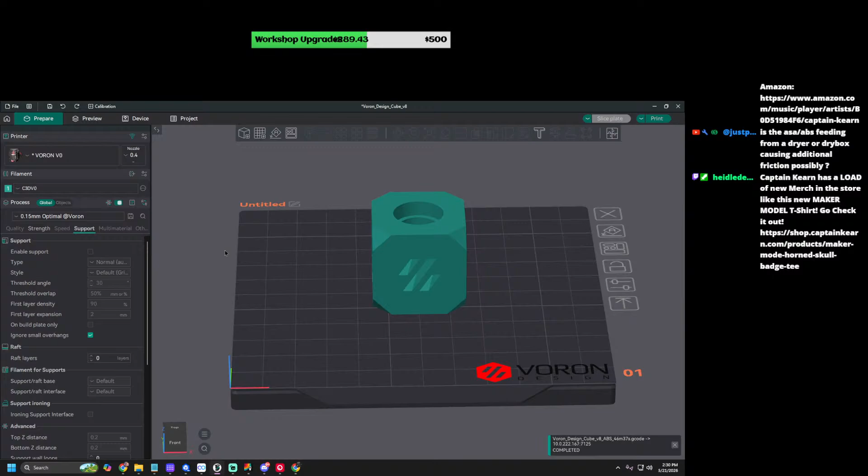No, it's not coming from a dryer box. It's coming from the spool on the back. All right, well, that gets ready to do its thing. Give me a second, and then I will be back on screen here.

I'll be back on camera. Oh Lordy, I have to go do some stretches real quick, guys. This is, honestly, we set out to clean the workshop today, and we've actually made more of a mess. I love it.

I'm trying to actually get some stretching in here, and I don't think anybody wants to see my big old butt bend over. No, no, no, no, no. It would not be wet filament.

So, oh, there we go. There's me. And for some reason, the camera is not at the right height. There we go. And let's bring the webcam back down. It's a very interesting angle that I put the camera on the V0 at. So, be back in a bit. Perfect.

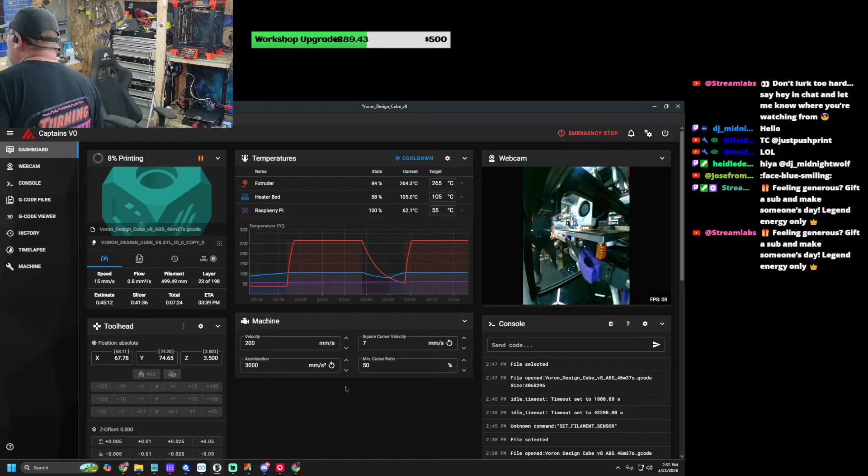Oh Lord Almighty. Well, we will see here. Is that thing gonna... oh God, that print looks like garbage. That is hot. Yeah, that is stupid hot garbage.

And it stopped pulling filament again. And it only does this, it only does this with ABS and ASA. I don't understand.

Mad Dog Jeff, hello from the future. What's up, buddy? Oh, we have a severe thunderstorm watch for my county for the next 7 hours, 45 minutes. Yeah, this is bad. A friend of mine who's a storm chaser sent me a text this morning saying bad supercells are coming this way. And I'm like, please, for the love of God, no. I can't handle this today or this summer at all. So yeah.

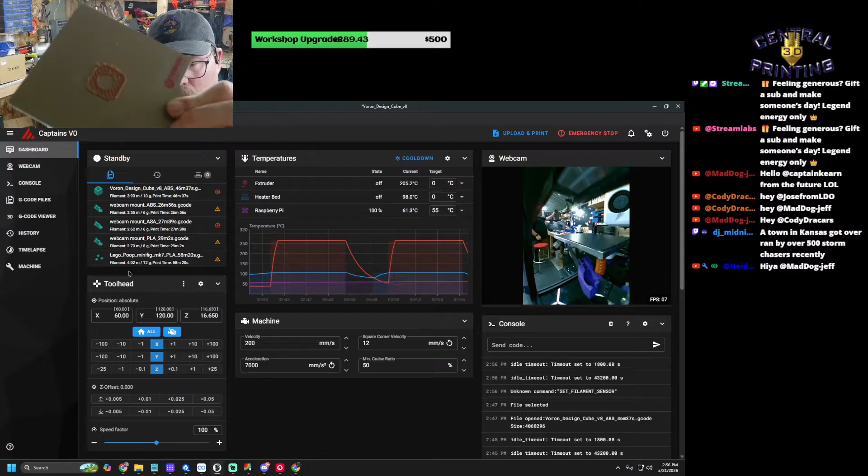You guys don't even need to see that garbage on the bed. But it started air printing, and I don't even know what it's doing at this point. But before it stopped printing, this is what we were coming up with. It's garbage.

A town in Kansas got ran over by 500 storm chasers recently. Yeah. So...

I am of the opinion at this point that I'm just going to have to tear down this. I don't know, I mean, is there... let's pull this out. See, I'm not even seeing gear marks on this hardly. And I've got this spring pretty tight. That's bothering me.

Holy poo, what camera fits in the V0? That camera is actually a camera that you can get from Anycubic, it fits on the Kobra 3. It's about 23 bucks, and I have it just mounted in the back corner with VHB tape.

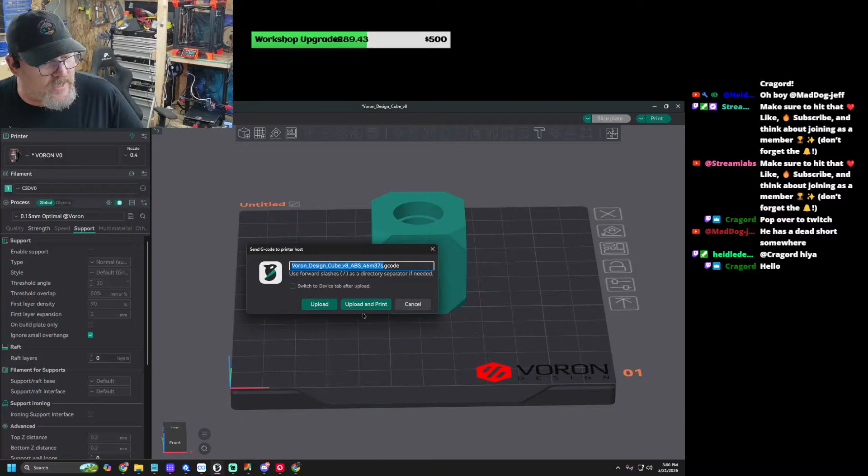All right, let's do it again. Oh, better close the lid.

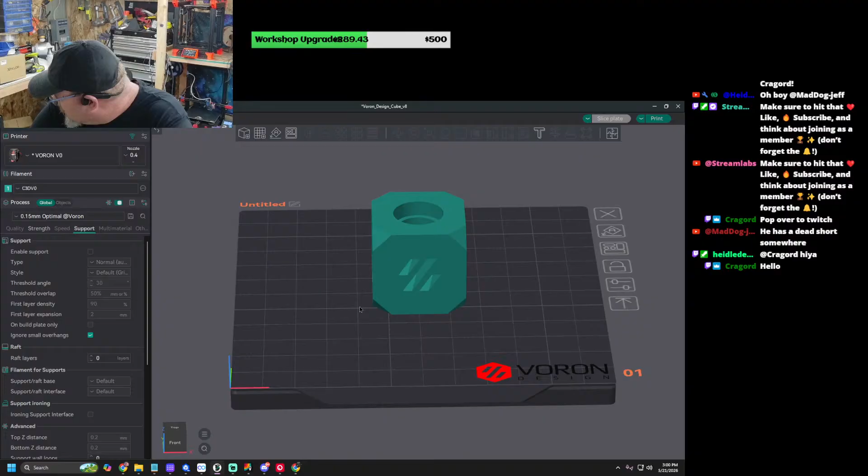But the one thing that I have learned in this hobby is you don't get frustrated, you just get even. If you get too frustrated, everybody, you just get up and walk away for a little bit. And it's one thing about me is I just don't get frustrated much anymore. Dead shorts are an absolute pain. They really, really are. There's not much you can do about it either. Not much you can do about it indeed.

So as you guys, if you've been sticking around, we've had a lot of projects going on. All right, we got the first plate of multi-board done. One thing if you guys didn't hear, we are converting over from HSW to multi-board on the wall. And I'm actually kind of looking forward to it. I've had HSW for a long, long time.

And check it out. So we got the first one done. And we're just going to hit the reprint option over on the Centauri Carbon. Full 8x8. And print.